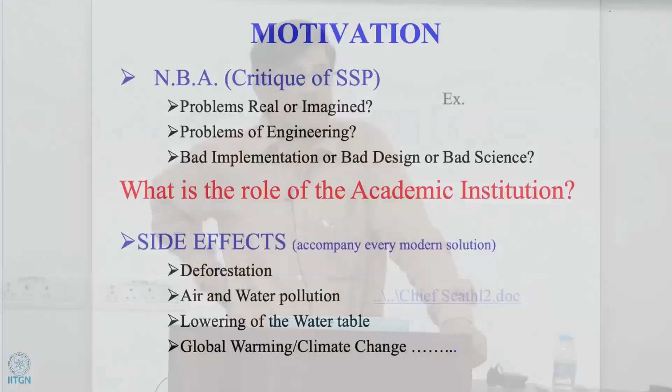The other reason for getting into this is that what I found was most of the discussion of these problems happened outside the university and outside IIT Delhi. It was mainly in the newspapers. There were discussions between non-governmental organizations, but it appeared that this problem had bypassed engineering institutions completely.

I found out later that there probably is a good reason for it, because some of the people at least involved in the decision making do come from IITs, and probably one of our deputy directors at the time when I joined was party to some of the decisions. So there is a good reason why IIT Delhi was not involved in the critique.

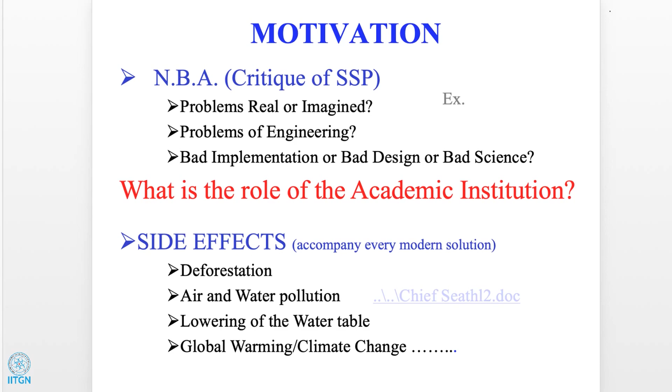Now, the other thing is, is this just a problem of the large dam, or are there side effects for other engineering projects also? I think this is a topic that people are fully aware of now. Almost any scientific advance or technological advance brings with it a host of problems.

And I've listed a few here. You can see deforestation, air and water pollution. Those of you, some of you may have noticed that, being exposed to the really polluted air in Delhi, I'm condemned to wear a nose filter almost the entire day. I cannot get by without it. But that is what we have done to our air and water.

Then the other things, global warming, climate change, everyone knows.

I just want to briefly point out a quote by a Native American chief, from a letter he wrote to the President of the United States. I don't know if you've seen it - it's called Chief Seattle's letter. One statement he makes, discussing how Native Americans reacted to American development, is that if you continue to contaminate your bed, you'll one night suffocate in your own waste.

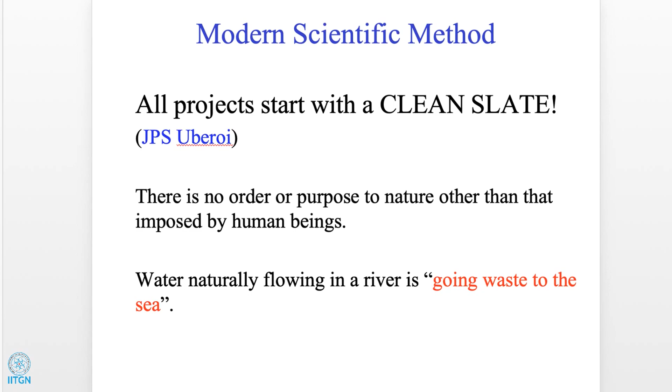Another way to look at it, which is what Professor Uberoi pointed out to me, is that all our large projects start with a clean slate. What that means is that they assume there is no purpose or order to nature other than what is imposed by us. So the river flowing to the sea is of no use - it's just going to waste to the sea. It has no additional purpose until we dam the river and use the water for irrigation, drinking, or whatever. The river by itself has no original purpose.

So just to reiterate the point, in this enterprise, well-posed problems are of this kind: if you ask an engineer to design a car that can accelerate from 0 to 60 kilometers per hour in 5 seconds, it can be done. If you ask someone to send a manned spacecraft to Mars, it might be difficult, but it can be done.

But if you ask a second type of question - how many automobiles can the environment around Gandhinagar support over a period of something like 1,000 years - then we have no way of even thinking how to start addressing that question. Or how many wind turbines can be placed on the coast before the climate is adversely affected.

The reason is that most of our powerful tools are what are called reductionist. We can take a complex problem, break it into simple parts, and apply very strong analysis on it. For example, the starting point in any discussion of mechanics is the free body diagram, and it's a very powerful thing. We want to analyze a small part of the system. Somehow the hope is that once we've broken up a large system into simple parts and optimized things, when we put it back together, it will magically fit. And that is not always the case. If it doesn't fit, we have no way of understanding how to fix it.

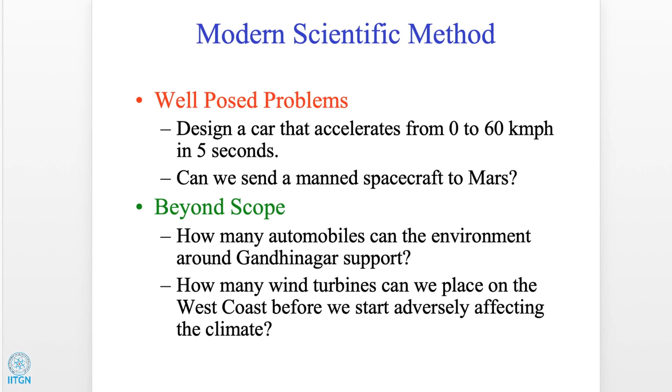I think probably the only one I found is a small book by Maxwell, where he clearly says that we can only address problems of the system that we have isolated. We cannot see what the system does to the rest of the environment. And if we need to do that, the environment has to be included in the system. The other thing is, say in thermodynamics, the starting point is an isolated system, again, which is an abstract construct, which has absolutely no bearing with anything that we do, because everything we're dealing with in life is an open system.

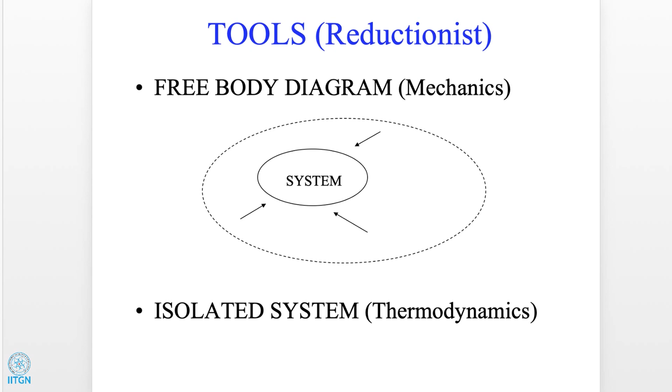So then the question was, is there another way of doing this? I'm sorry, it's a very long introduction. And the hope was by studying examples of traditional engineering, we would get to this.

Now, our interest in traditional structures, therefore, did not come primarily from an interest in history or looking at examples to highlight our glorious past. The idea was to see whether there is something in them that allows us to do our engineering differently. There is.

Some evidence, and everything that we studied only seems to strengthen that, saying that most of our traditional engineering systems which have survived seem to function in a way that sustainability is intrinsic to their method. Which means that can we do something, ought we do something, seems to have been answered together when they were designed and put together.

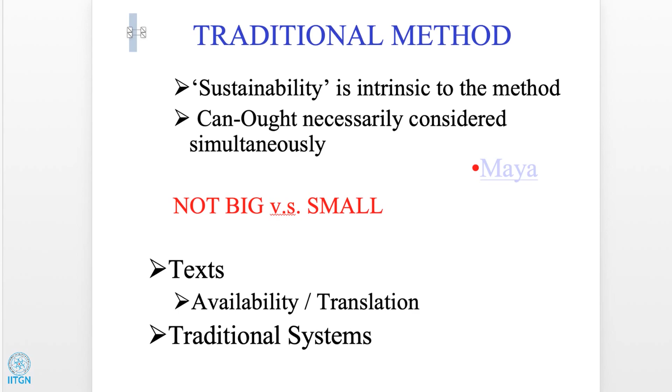It's not necessarily that all small systems are good. Some people argue that large systems are inherently bad and small systems are good. To an extent, yes, but you can do a lot of damage with very small systems if they are replicated en masse. For example, in a large irrigation project, a tube well or bore well is a very small thing. But if you indiscriminately put thousands of tube wells, then you can destroy the groundwater. So it's not a question of big and small.

Now there is some other evidence, not just from the structures, but from the texts that are written about these. I'll give you one quotation from a text on architecture called the Maya Mata. Among various other things, it has a section on when you're constructing a building or a temple. The passage preceding this is about what trees are useful. So it lists a whole number of trees like teak and sisam, etc., which can be used for construction. And then after that, it has a paragraph on the trees to be avoided.

So the chosen tree should not be close to a temple, should not have been struck by lightning, nor scorched by any conflagration. It should not be growing in a place inhabited by spirits, nor beside a major roadway, nor in a village. They should not be frequented by birds, nor by wild animals. They should not be dead, nor serving as shelter for Chandala, nor for any men of any caste whatsoever. They should not belong to any god or deity, nor should they be found near a tank, well, pond, or like place.

So the dam itself, the overall length is about 100 meters, the height is about 12 meters, and the width at the top, I will show you detailed pictures, is about 20 meters, and at the bottom, obviously, it flares a bit, it's about 30 meters. By the international classification on dams, it does not fall under a large dam. For a dam to be classified as a large dam, it has to be above 15 meters.

The location, I've given the latitude, longitude, but really the easier way to locate it is that it's slightly south of Surajkund, which is a well-known landmark in Haryana, about 10 kilometers south of Delhi. It's a stone gravity dam. There is some confusion about when it was built. It was either built by King Anangpal I or the second, which means the date could either be 7th century or 11th century, but definitely we know it's older than the 11th century and newer than the 7th century, so it's at least 1,000 years old.

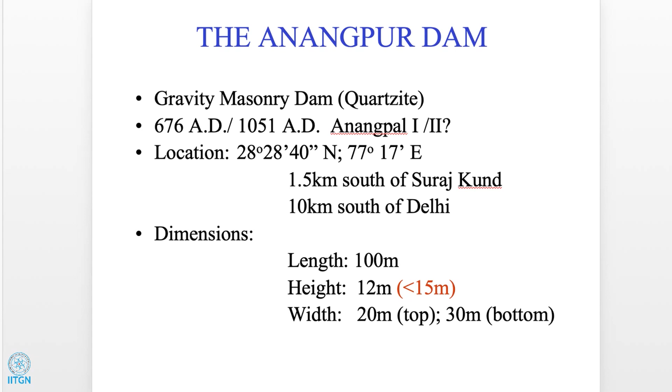This is a map that I've taken from an ASI report. So Delhi is here, and Faridabad is here, and so Anangpur is somewhere there.

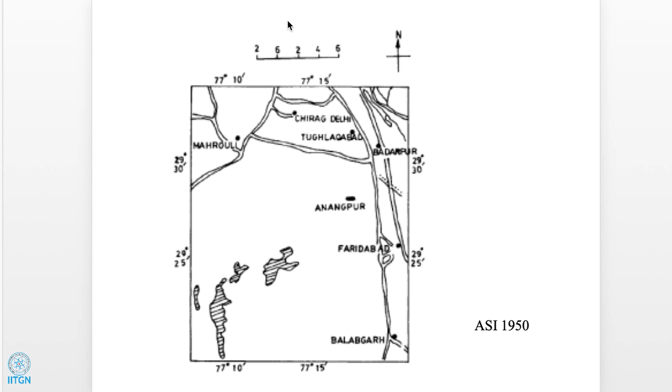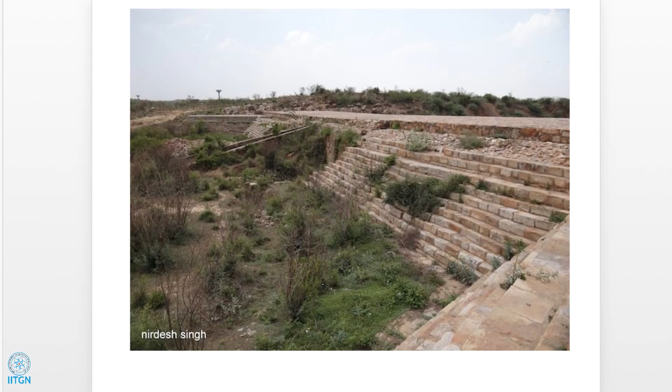Again, this is a photo of the Anangpur side that I've taken from the internet. You can see the construction - this is 1,000 years old. We didn't notice any cracks when we went on our field trips in the mid-90s, and there was lots of overgrowth here, but if it's cleaned up, it is perfectly in good shape, and it can still function if the rest of the system is revived.

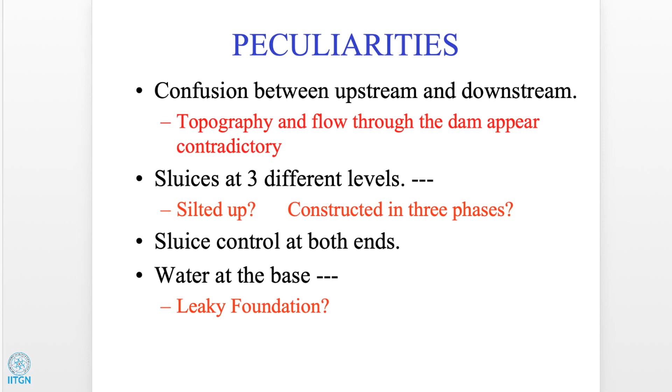When we looked at the dam and whatever reports were available, there were some things that puzzled us. One was that if I look at the topography, the Anangpur side is where the water must flow down from, and it must discharge towards the Surajkund side, which means if it is to be a dam, the reservoir would be on the Anangpur side, and the region that could benefit from the dam should be towards the north or towards the Surajkund side.

On the other hand, if we look at the topography in greater detail, the land is flat on the Anangpur side, and you have a deep gorge on the Surajkund side.

Also, some features of the construction indicated that the flow was actually going from the Surajkund side to the Anangpur side in at least part of the dam, and some other features indicated the flow was going from the Anangpur side to the Surajkund side. So there seemed to be confusion about which way the flow is going through the dam and what the dam is meant to do.

Then the other thing is the dam had sluices at three different levels. One conjecture in the ASI report is that the dam was constructed and then it silted up, so the height was raised and another set of sluices was built. Again it silted up and the height was raised a second time, and then the last set of sluices was built.

Let's look at the elevation first. There are 3 levels of sluices, as I said. This is the bottom 2, then there are 3 in the middle. This central one connects to this funnel that is shown on the Anangpur side. And then there are 2 at the top. These 2 connect to a channel here which runs down this slope, and then there is a little receptacle made at the base here.

If I look at this structure, it would appear that the flow is going from top to bottom. But if I look at this structure, it appears that the flow is meant to go this way, run down this slope, and assemble there, and collect in this receptacle. So either the designer was very confused, or the operation of the dam is not so straightforward.

Again, if you see these side abutments, they are on the Anangpur side. Now, if this is the reservoir, you would expect the abutments to be here, not on this side. If the reservoir is on this side, that is when you would need to provide these structures to hold the dam in place.

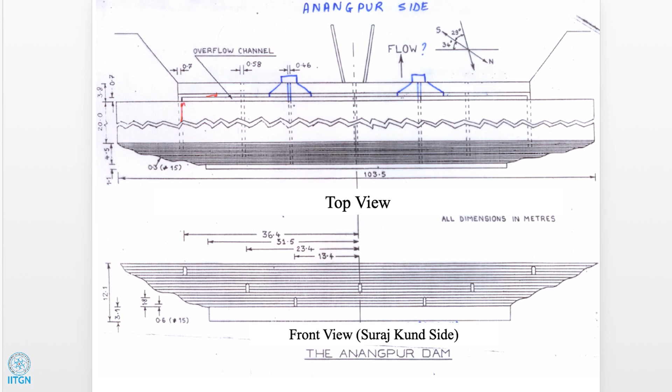Now, if you take a look at the cross section, then this is the Anangpur side, and the ground level is about 6 meters higher than on the Surajkund side. This is the reason why the ASI report felt that the dam had silted up, and it was built in 3 phases. But what we feel is that this is how it is meant to be.

The bottom sluices are meant to operate underground, and actually they come underground and connect up to the receptacle into which the top sluice also empties.

The points we noted fairly quickly is that, as I said before, there are no signs of 3 stages of construction. It was one coherent structure. The sluices from the top level, mid level, and bottom level, they were all of approximately the same height.

I think that we can see here. This is the height of the sluice going in at the top. This is the height of the sluice going in the middle, and this is the height going at the bottom. All of them are about 1.8 meters, but the width changes as you go from top to bottom.

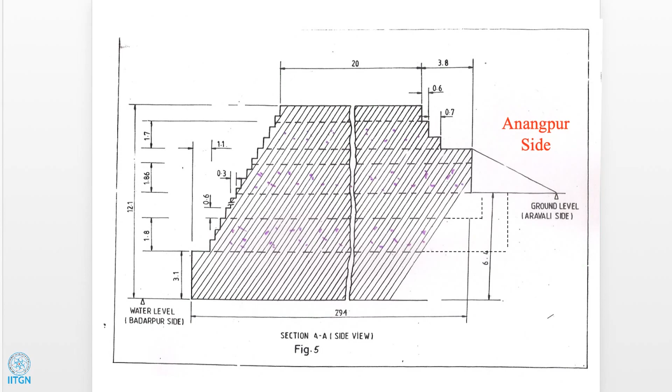The 1.8 meters means a human being can walk through the channel, and if you want to do any maintenance work, then this height is required.

But the top level sluices would have to have a larger cross sectional area, because the hydrostatic pressure available for flow is less there, so they are a bit wider, and when you go to the bottom, they are narrower. So it has been very carefully done to allow easy access to the sluices, while keeping in mind the requirements at top and bottom.

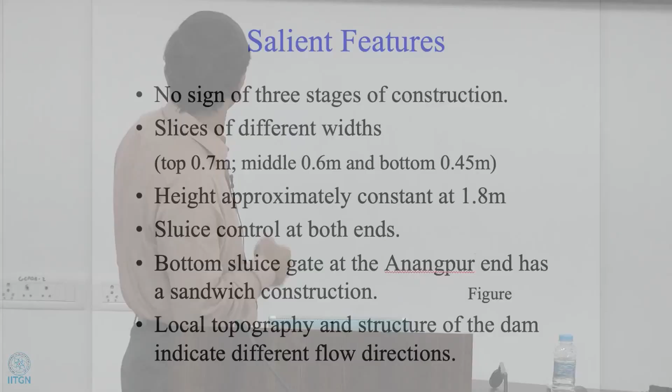So the top one is 0.7, and it goes down to 0.45 at the bottom. As I said again, the sluice can be controlled at both ends.

And the bottom sluice also has an interesting construction. It is built in this way. At the end of the sluice, where you need the gate to operate, it does not operate just in a channel, but there are 2 stones with holes in them, so you have 2 slabs with holes, and then the gate operates between them.

Now, there are 2 reasons for this. One is you can control the flow more easily, because you can control the size of these holes. The other is, if there is any silt or sand in the vicinity of this channel, these slabs would prevent that from interfering with the functioning of the sluice gate. So it is a clear indication that the bottom level sluices were meant to operate under silt.

They are not, yes? What would be the mechanism for lifting the gate? The total height is about 12 meters, so you could have a rope and pull it from the top. Those things, the gates themselves, are missing.

These are all stone. So maybe the gate itself may have been wood, because that would be slid in. You don't want it to be too heavy when you want to pull it up, right?

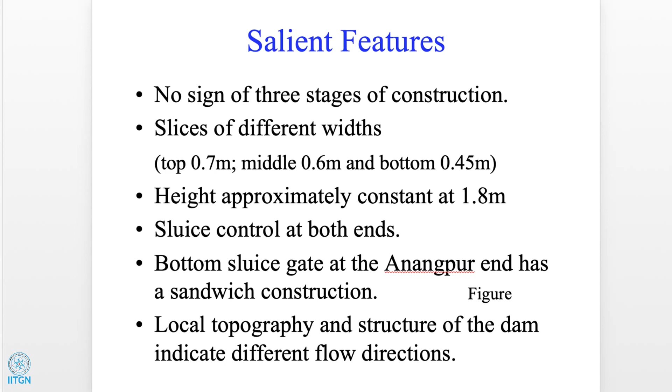So what we could gather is that this dam by design is meant to allow flow in both directions. That is why the dual control for the sluices, and that is why the peculiar construction, where at one level the funneling of the flow is in one direction, and at another level it's another direction.

Now, before I go to how we think it functioned, we can look at simple engineering, do a simple engineering analysis of the dam.

If you look at what is the maximum water pressure that would come on the dam, which has to be resisted by the weight of the dam, then the factors of safety look ridiculous. The overturning factor of safety, the overturning moment is so small compared to the weight that you have a factor of safety of 37.

And even if you don't have the abutments, the factor of safety for sliding based on the local soil is of the order of 7. With the abutments, the factor of safety would be even higher.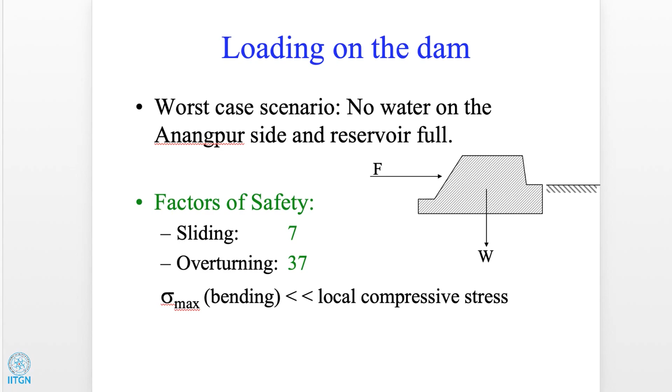And the way it's constructed, there's no chance of the dam being in tension anywhere, so there's no chance of it breaking or cracking up. Now, one might say that this is hugely over-designed, but if you're planning a structure which is meant to last a few thousand years and be subjected to lots of natural calamities or events like earthquakes, then I don't think this is a large factor of safety. It is probably as large as it needs to be.

So what we gathered then is that the main function of the dam is to act as a sort of a bund during the monsoon and recharge the groundwater on the Anangpur side, and prepare the soil for cultivation. And then on the downstream side, it's not a leaky foundation, but it's a natural spring which feeds into

the gorge on the Surajkund side. And after the monsoon, you close the gates and allow the reservoir to build up, both with the rainwater that you have allowed to go through the dam, through the mid-level sluices, and build up to the top level using the springs that are available at the other side of the dam.

Now, I don't want to say upstream and downstream, because now both could be upstream and both could be downstream. So the Surajkund side is where you have springs which allow the reservoir to be built up there. And so the top level sluices and the bottom level sluices are used to feed water back into the cultivated area when you have the dry season.

And our initial conjecture was that for this to function, for you to have a reservoir, then you must have another structure which holds the water between the Anangpur Dam and the Surajkund. And we felt that there is a bund here called the Lakarpur bund, and so we felt the reservoir is this whole thing, and this is what completes the system. And that's what we conjectured at the end of our first study.

And only when we actually surveyed this area, we found that that cannot be true, because the top of the dam is at 230 meters above sea level, and the top of this bund, the Lakarpur bund, is only 220 meters. So that cannot hold, you cannot hold the water between these two.

And so the second student I had, Vijay Srinivasan, and I and Professor Oberoi were breaking our heads over this and looking at the contour maps to figure out what was going on. And we were fortunate, we had a non-specialist, my wife, who's a philosopher, and she suggested that maybe there's one more dam that closes the system other than the Lakarpur bund. And actually, when Vijay looked at the contour maps in detail, he found a candidate position where a second structure could be placed, which allows this to be a coherent system.

So I don't know if these contour maps are clear enough. This is the contour at 230 meters above sea level, which is the top of the Anangpur Dam. And if I follow that back, there's another region where it narrows, and we could put another structure here, which could then allow water to be trapped in this region, and the water could then be used for cultivation in this part. The Lakarpur bund is here, and that is at 220 meters.

Now, as I said, the Anangpur side, the land is much flatter. You can see the contours are much wider spaced. Here, the contours are closely spaced, indicating that there's a deep gorge.

Now, again, we were fortunate that these contour maps are available and made well before our first visit to the site, because when we visited the site in the mid-90s, by then this spot was destroyed completely, because there's a lot of mining, quarrying activity going on there. A lot of construction in Delhi benefited from the stones that were quarried in this region. So this part was completely, the land was much flatter than what these contour maps indicate.

Okay, but these maps were obviously made well before the quarrying activity started, and therefore we were able to locate a candidate position for the second structure, what we call the Surajkund Dam.

If you follow the 230 meter contour and extend it to the 235 meter contour, we have about 320 to 370 acres which could be cultivated from the water stored by these structures.

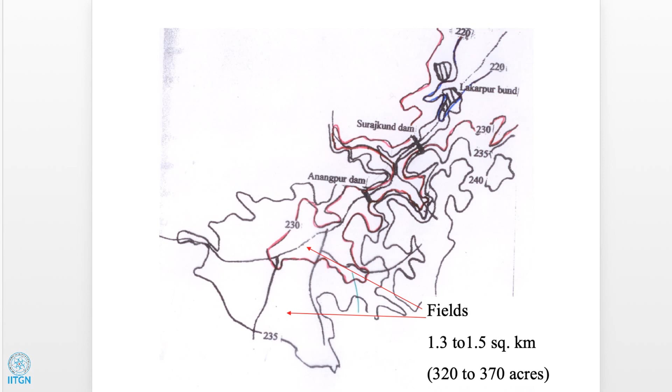This was the hypothesis that Vijay Srinivasan worked with: that for the system to function properly, there must be a second structure, which he called the Surajkund Dam. You would also need some flow control through this device so the entire system can function. So not only is there a second structure, there is also a gate possibility of controlling the flow in the middle of this structure.

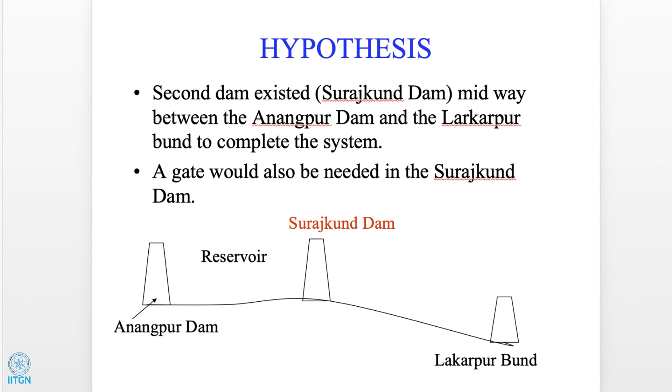He also investigated the natural springs in that area, and found one spring at the base of the dam, which led to the conjecture that the foundation is leaking. There is one spring that feeds here, and another spring that feeds the same system. There are several other springs, one feeding water to the Surajkund temple, and another at a Gurukul nearby. But the two springs of interest are SP1 and SP2, which fill up the reservoir trapped between the Anangpur Dam and the Surajkund Dam.

So these contour studies were used to predict where the second gate would be. And you said the dam structures were completely destructed when you did the contour study. So how was the height concluded? What would be the height of the Surajkund Dam, the other gate, or the Lakarpur Bund? The Lakarpur Bund is existing. The quarrying activity happened between the Anangpur Dam and the Lakarpur Bund.

So there is no evidence. We don't have any evidence for the Surajkund Dam. This is our hypothesis, that it must have been there for the system to work. On the other hand, there's no evidence to disprove our theory either.

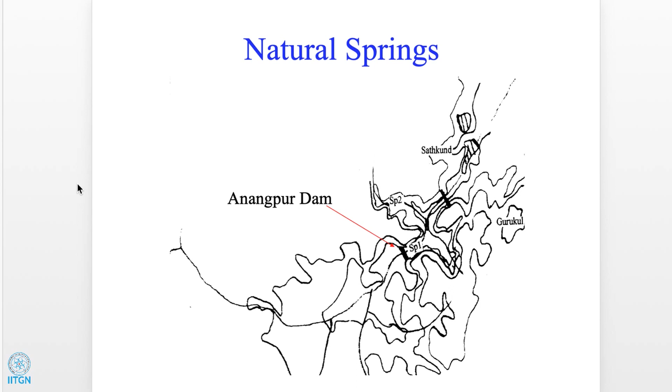Then we can go through a bunch of numbers. Vijay digitized all the contour maps so he could calculate the area enclosed in each contour, and then estimate the volume of water that could be stored on either side of the dam during the monsoon. As I said earlier, the area between the 230 and 235 meter contour and the area enclosed by the 230 meter contour are given here.

So the total cultivable area is about 1.7 square kilometers. The volume below the 230 meter contour is about 0.7 million cubic meters. The capacity of the reservoir on the Surajkund side, between the Anangpur Dam and the Surajkund Dam, is about 1.2 million cubic meters. The catchment area that fed water into the system from the surrounding area is about 13 square kilometers. This catchment area was destroyed well before our survey, so when we visited the site in '95, there was no large flow coming into the dam area.

Now the other numbers we need: the local rainfall is about 0.5 meters every year in this area, so from the catchment you would get about 6 million cubic meters. Vijay was also able to use gauges to estimate the flow from the two springs, and if you add that up, you get another 6 million cubic meters per year.

The evaporative loss is about 2 million cubic meters. So you can see that what is available is about 6 times what is lost from evaporation over the total surface area covered on both sides of the Anangpur Dam.

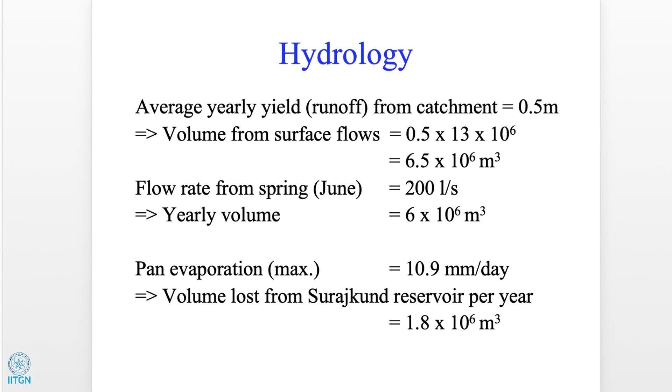One can also look at what is required if one cultivates two crops, rice and wheat, the Rabi and Kharif crop. Using fairly conservative estimates, we found the total volume required for both crops is about 2 million cubic meters. So discounting the evaporative loss, the system in principle can yield about 5 times what is required for cultivation. You need only successfully trap about 20% of what is available to cultivate both crops.

If you convert the cultivated area to numbers, how much rice and wheat you can cultivate and what the per capita consumption is, a very conservative estimate is that it could support about 5,000 people. If you were less stringent, you could argue it can support a population of about 10,000, which would make it more like a town rather than a village. So it's likely that produce from here did not just stay within Anangpur village, but also helped the Tomar kings supply parts of Delhi.

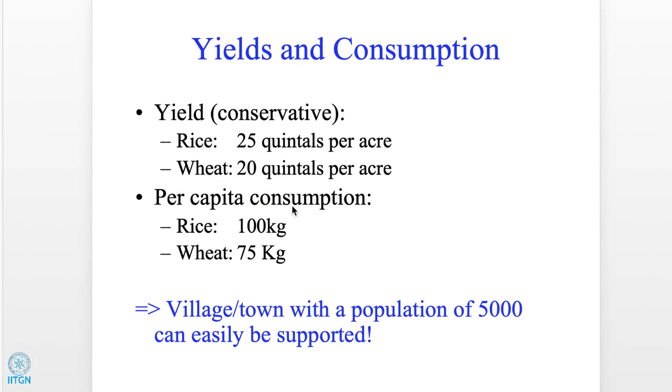I will go briefly through this argument. To allow the system to function, it's not enough to have the water available. One needs fairly fine control on when to open and close different gates in the Anangpur Dam and in the Surajkund Dam. We found that we have 3 choices here, and if we add one more in the Surajkund Dam, then the entire system can function well.

If you want a detailed discussion of the entire sequence of in which month to open what gate and so on, you can look at Vijay's thesis. I'll just briefly go through the argument here.

During the monsoon, you might want to partially flood the Anangpur side, but you don't want to trap all the water there because then you can't cultivate anything. So you would keep this gate open and this gate open so that the water fills up to the ground level on the Anangpur side, and the rest is drained into the Peacock Lake, flowing through the Lakkarpur Bund into the Yamuna. So during the monsoon, both these gates are kept open, and the water accumulates up to the level of the middle sluice in the Anangpur Dam, which is the ground level on the Anandpur side.

Towards the end of the monsoon, you might close gate number 2 and allow the water to build up a little so you can have some flooding for rice cultivation. The seedlings are usually submerged to allow them to survive pests, so you close this gate and allow some flooding here to plant the seedlings. After that, you can transplant the seedlings, and they become quite hardy, so you don't require the flooding anymore.

After the monsoon is over, you close this gate and this gate also, so the reservoir fills up. Once filled, the excess can flow over the Surajkund Dam, and all that water becomes available. This, as we said, stores about half of what is required, and as it's used up, the underground springs recharge the rest. That is how you can get the entire system to function.

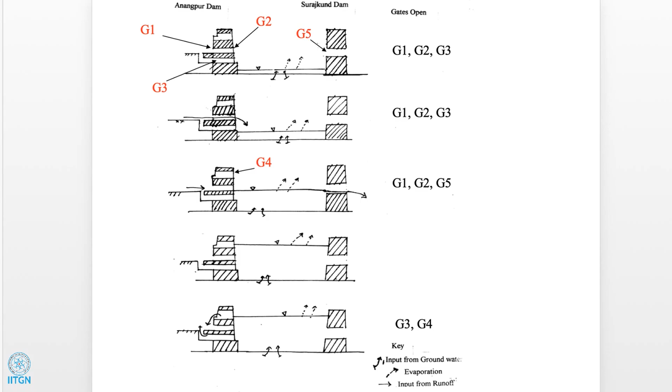So this is the main conclusion: the second dam at Anangpur is required to complete the system. If that is provided, you can cultivate 2 crops quite easily, and very comfortably support a population of 5,000. There are several peculiar features about this dam: it uses both surface runoff and underground springs to function, and it's a bidirectional dam.

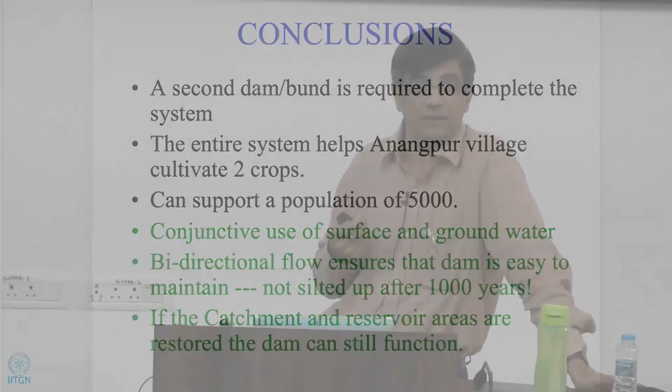There are a couple of other features, the scale is such that it's very easy to maintain, so the siltation problem is not very crucial. There are a couple of features which prevent siltation. One is that on the Surajkund side, where you have the main reservoir, the spring is right at the base, so any silt likely to settle near the base of the dam is kept in suspension by the spring flowing into that region.

The other feature that prevents siltation is the stepped form. There's a very interesting work showing that if you have a slope, anything non-vertical, the rate at which silt accumulates on it is an order of magnitude higher than what would happen on a vertical or horizontal surface. The reason is that when you have a... I don't know whether I can draw it here.

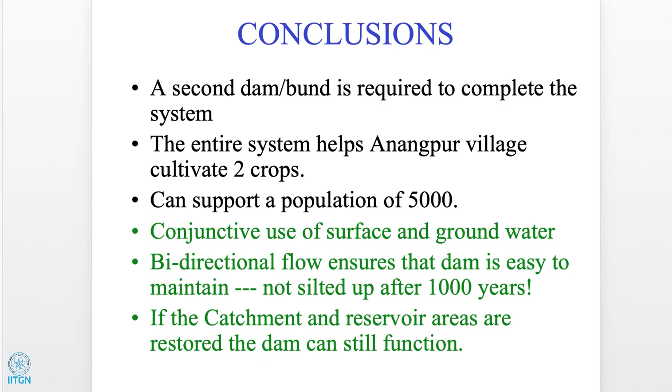When you have sediment depositing here, gravity forces the sediment to slide down the slope, and this creates a secondary flow which brings more sediment down. This mechanism is absent if you have a structure like this, because it will just sit there. So the stepped construction may have been designed only for ease of access to different parts of the dam, but it has the great positive side effect that it prevents sediment siltation also.

The other thing is that the main structure itself is in such good shape that if the catchment area is restored and the reservoir is restored, it can still function.

We are still left with one open question. The temple, or the Surajkund pond and temple, are within 1.5 kilometers from the Anangpur Dam. Is there a relationship between the two structures? We have not been able to figure out an engineering relationship. There may be an obvious cultural relationship - when you have something as important to your survival as a dam, you might want to create a temple so that people respect it. But beyond that, we have not been able to find something, though I wouldn't be surprised if there's something deeper than that.

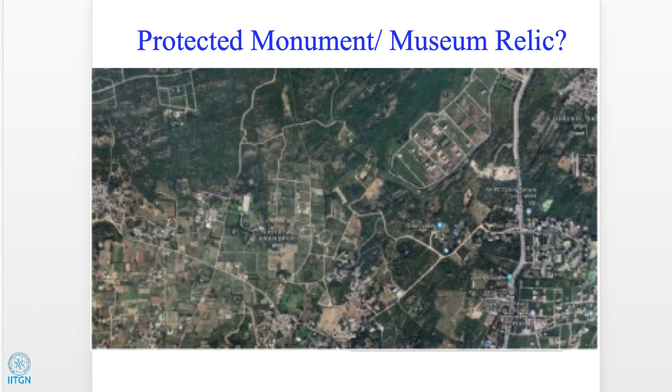Okay, this is a logical place to stop if you want to have a discussion, because I think I've taken a little longer than I expected.

Question: What time did the dam system stop working - the Surajkund Dam you mentioned? Answer: We don't have records, but it's at least 200-300 years, because there were some surveys done in British time, and there was no mention of the dam being really functional. The later ASI reports don't mention anything other than the dam. Interestingly, even the earlier surveys don't mention the second structure. When we did our survey, we couldn't find even traces of the Surajkund Dam because quarrying activity had started, but the earlier reports don't mention that, so that is still a conjecture. On the other hand, the earlier reports don't connect the Lakarpur Bandh with the system either - they looked at it in isolation. So I really don't know till when it was functioning.

Question: In modern scientific methods, when they build a dam it has adverse effects on nature, but the traditional dams didn't have that - can you explain how? Answer: One thing is obviously the scale is much smaller, and this is not a region where water was flowing through otherwise - it was a channel that was feeding into the Yamuna. So you're not creating a flow in a region where it did not exist before. That is one difference.

This is what is called the kuin-par system of Rajasthan. Kuin is a well, not a very deep one. We first learned about this in a lovely book by Anupam Mishra, written in Hindi, called Rajasthan Ki Rajat Boonde, which loosely translates to the radiant drops of Rajasthan. There's fortunately an English translation available, which is how I was able to study it in detail.

This is the traditional water harvesting structure, or drinking water structure, found in the arid regions of Rajasthan. The par system, the entire system, is called the par system. It consists of a kuin, the well, and an agor, a pond surrounding the well which in the monsoon is full of water. The agar is the catchment. So this is the local terminology: kuin, agor, and agar. The three together form the par.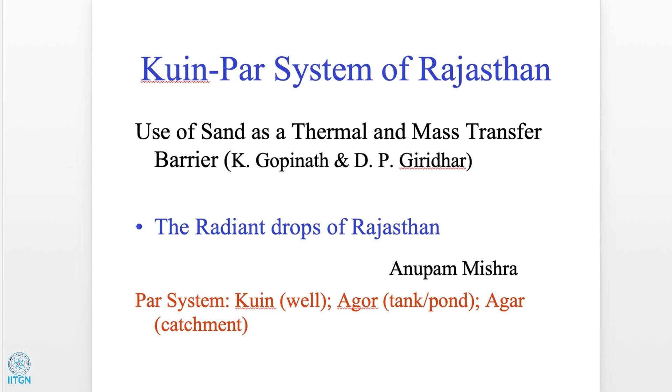Here's the field work that we did, I think in 2003. This is a typical par system, close to Jaisalmer, called the Khadera par. We had gone there after 3 years of continuous drought in Rajasthan, and these wells still had plenty of drinking water.

The depth of these wells is not very high, maybe 5 to 6 meters. But the water table in Rajasthan is more than 100 meters deep, about 150 meters deep.

This is a sort of cartoon about how the system works. As I said, the water table in Rajasthan is very low, about 150 to 200 meters below the sand. Even if you take the trouble to dig a bore well that deep, it's pointless because that water is brackish, not potable.

But the locals have found that in several parts of Rajasthan, there are elevated impervious layers, either gypsum or multani mitti, which could be quite close to the surface, about 5 to 10 meters below it. Once they discover this region, they structure the catchment area so all the rainwater is diverted to where there's an elevated impervious layer, and the pond is built around that. In the monsoon, the entire region is full of water, and a bund is put around the pond so the water is stored there. After the water evaporates, it's trapped in the sand below the pond, and retained through these wells.

The important thing to note is that if one built the same structure with a rocky region below clay soil and trapped water there, it would not last more than a season. It's only because of the special property of sand that the water is retained, as we discovered, for more than 3 years.

The mouth of the well is quite narrow, about 1/10 the area of the actual well, and that's enough for you to access it with a bucket and rope. Around the well, marked with a stone structure, are two small containers in which water is poured for animals. So anyone who draws water from the well fills these up also, so that animals in the surrounding area also have access to water.

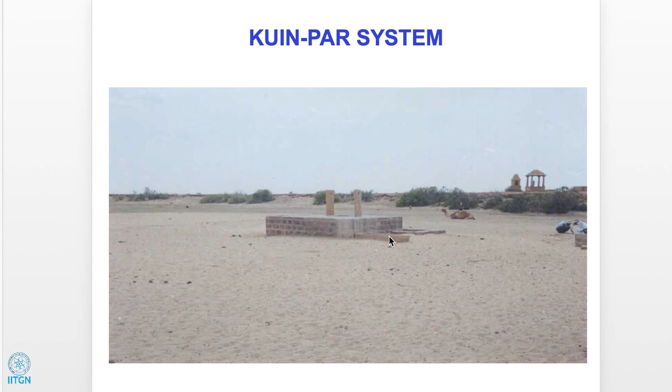In spite of all this, the water was available for drinking for more than 3 years.

This particular catchment area was 16 square kilometers, and the tank area was about 17 acres. We had about half a dozen of these wells placed at different parts of the tank. We went there in the middle of May, where the ambient temperature was well over 45 degrees, and the sand surface temperature was over 50 degrees too. But the water was always, whatever time of day, at 24 degrees. It was absolutely fit for drinking, and very refreshing. That is why we say this system uses the special properties of sand, which allow it to be both a heat transfer and mass transfer barrier.

It does not allow the water to get hot, and it preserves the water under the sand. So the basic physics is just this. What we decided to do is to see how large a layer of sand you would need for this system to be effective. That is our contribution beyond what was already discussed and described so beautifully by Anupam Mishra.

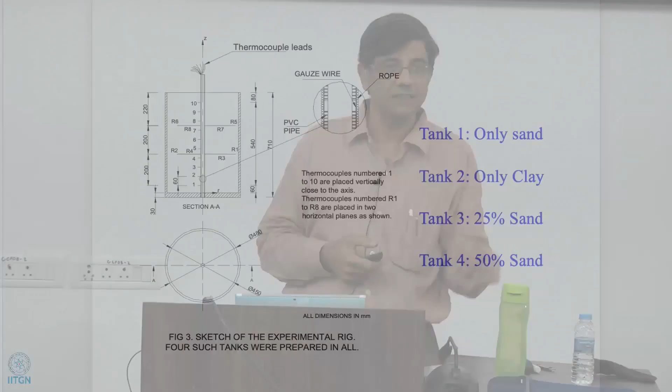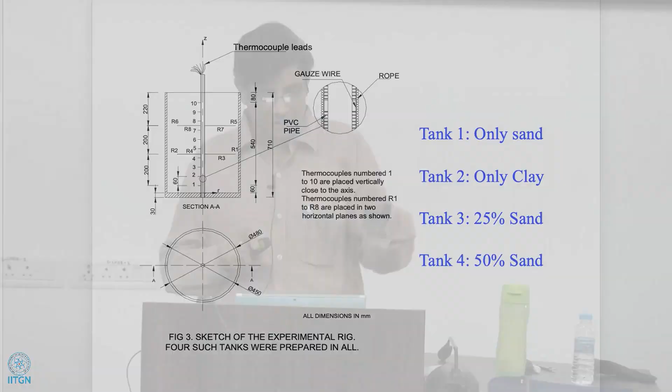So what we did was a simple series of experiments with ferrocement tanks, which could be filled with either clay, soil, or sand to different heights. We had a central tube from which we could monitor the water level, and also instrumented with thermocouples to see the temperature field. I won't get into great details, but we had 4 tanks: tank 1 filled with only sand, tank 2 only clay, tank 3 had the top 25% sand with total depth of 60 centimeters, meaning about 15 centimeters or 6 inches of sand at the top, and the last one had 50-50, so 30 centimeters of sand and 30 centimeters of clay.

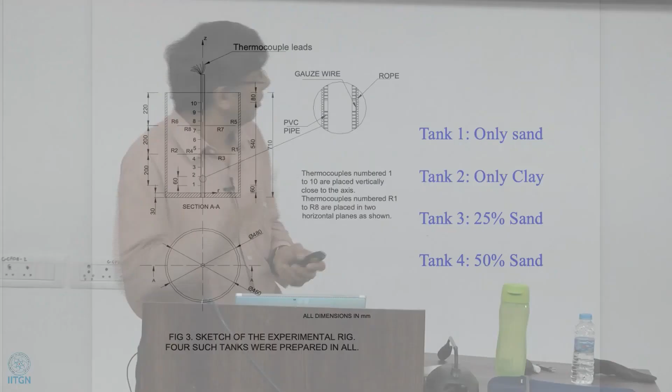All of these were kept underground to simulate the conditions in Rajasthan.

This is tank 1. In tank 2, this photo is not very clear, but you can see that after about a week, cracks start appearing. In the other 3 tanks, there are no cracks. This is a detailed view, I don't know if it's clear, but there is a small crack visible here.

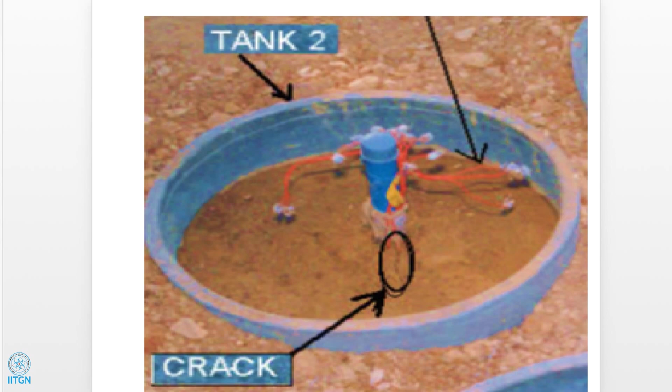Now the real important result worth mentioning is the water level in the 4 tanks. We monitored this over 2 weeks, and could have gone further. The 3 tanks that had sand at the top—one 100% sand, one with just 15 centimeters, and one with 30 centimeters—the water drops quite sharply initially because the sand allows the top layer to evaporate very quickly. So the clay is doing much better there. But after about 4 days, the clay dramatically drops, and after about 2 weeks, the clay tank is completely empty, while the sand is still going strong. This levels off, and I think you could take it for a few months and it would remain the same. So the message is that you just need a small layer of sand at the top, and you can use it as a very effective barrier from evaporation.

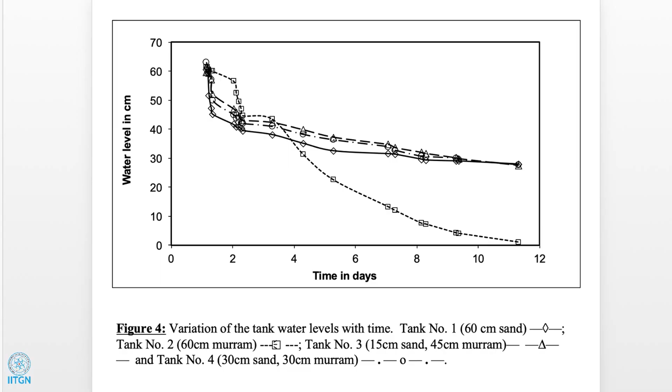Okay, so that's the main result. We had a positive side effect too, and that is the tanks with sand did not have any weeds growing.

We found out later that in certain arid regions of Karnataka, like Gulbarga, this is apparently one of the practices for rice fields or other cultivated fields—they put a layer of sand on top so that moisture is held at the root level. So it is an agricultural practice we found out later, but it definitely makes sense. The only thing you have to do is, when plowing the field, be careful and remove the sand first, then plow the field so it can be reused.

Okay, so that's the small problem that we looked at.